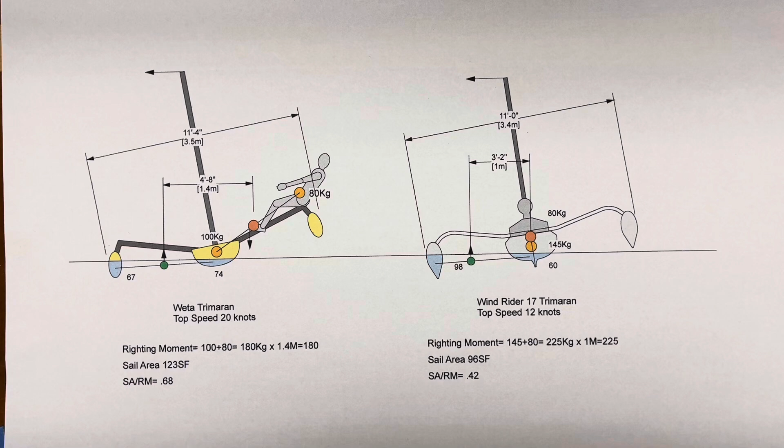Okay, so if you haven't already, I highly recommend that you watch the first half of this two-part video on righting moment so that you will get a better understanding. What I've done is taken popular boats and drawn them on my CAD system to scale, at least 95% correct. I know the overall width, I know the width of the hulls. I don't really know the dimensions of the outriggers on these, but I've studied pictures and I think they're fairly accurate.

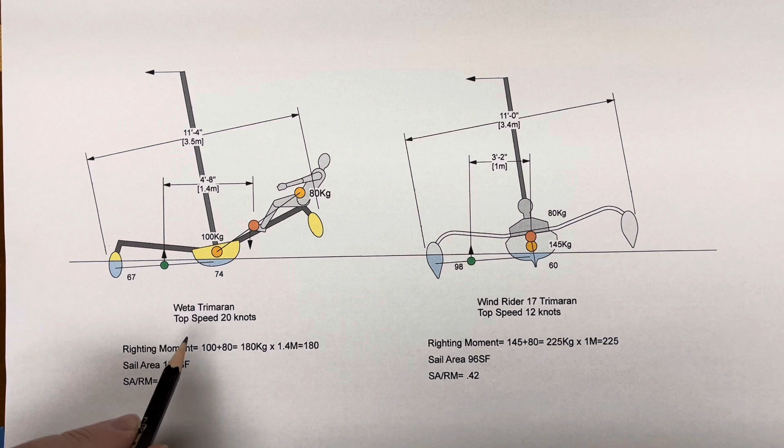So what we have here is the Wind Rider 17 trimaran, extremely popular with the Everglades Challenge and races like that. And then we have the Weta trimaran. Now both of these trimarans have floats that are less than 100% volume, meaning the center hull cannot lift completely out of the water.

Let's look at this one first. On this one, you stay inside the cockpit of the hull and you don't shift your weight. The weight of the boat is 145 kilograms, the weight of the person I'm just picking 80 for all of these. So the two dots, the person and the boat, are basically on top of each other. Then the righting arm, once you start heeling and going faster, you heel about 8 to 10 degrees, and you're sharing buoyancy between the two hulls. In this case, slightly more than 50% of the weight is in this hull compared to the main hull.

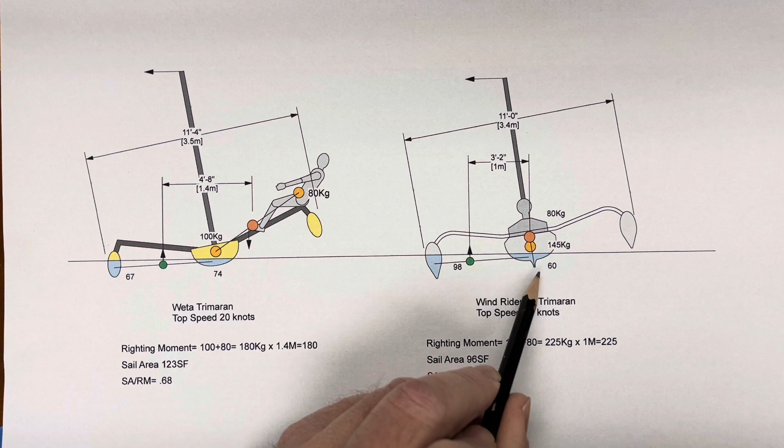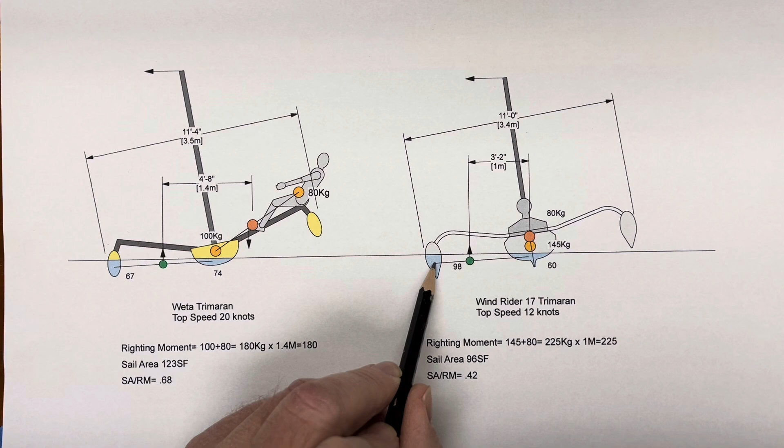These are the cross-sectional areas of the 98 and the 60, so that's where I get the position for this dot. It's slightly to the outside of the middle, between the centroid of this area and that one. So you get a distance of 1 meter, 3 foot 2 inches. The sail area on this one is 96 square feet, so you divide the sail area by righting moment and you get 0.42, which is really quite average.

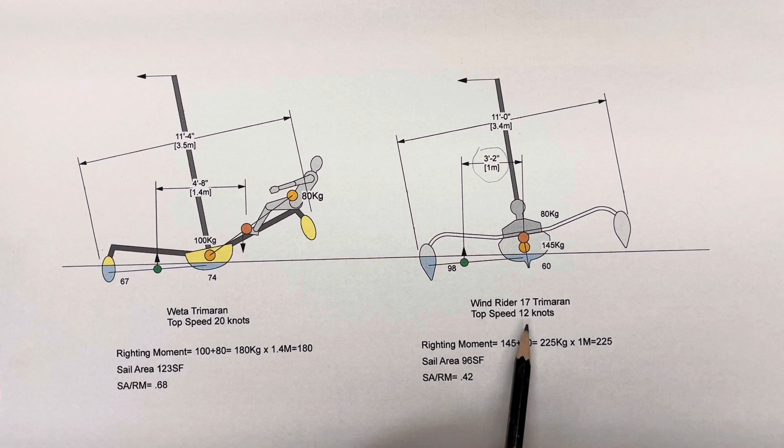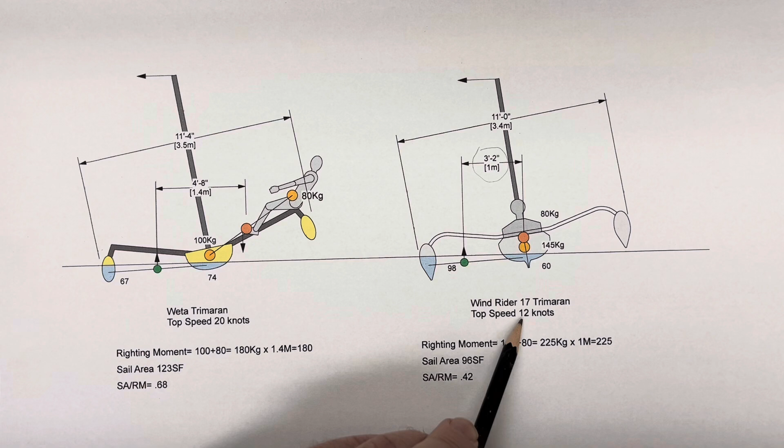The top speed of this boat is about 12 knots, and it's very similar to the Hobie Adventure Island, the Hobie AI. I believe both of these boats can go around 12 knots, but not over 12 knots.

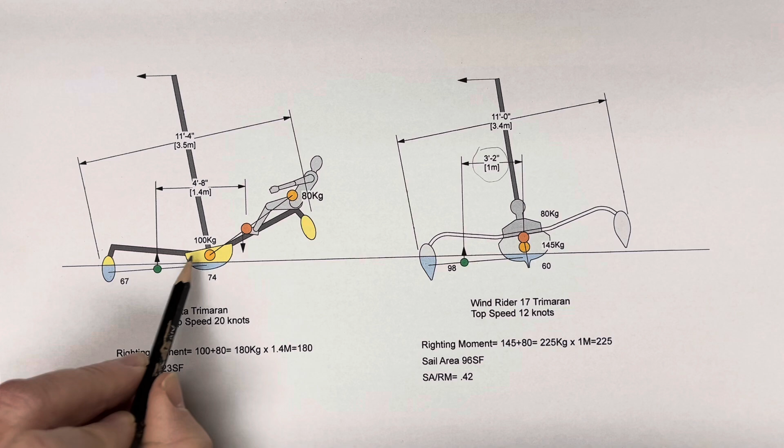All right, now we have the Weta trimaran. The difference between these is you can hike out on these wings, and these wings are pretty big. I saw a guy who got his center of weight almost on top of the outrigger. Now on this one, these outriggers have lower volume than these, but you have so much more leverage arm from the shifting of the crew weight.

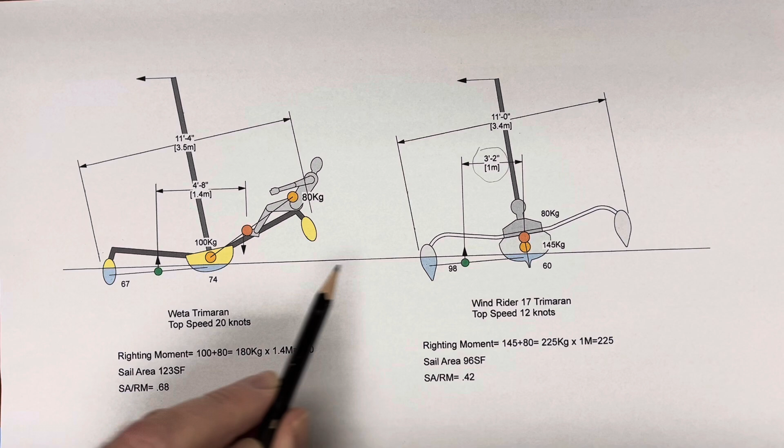So in this case, the boat is lighter. This boat was 145 kilograms; this one's 100 kilograms. This one's 17 foot long, but this one's 14 foot long. But the hull is a little bit more - this middle hull is a semi-planing main hull, and this one is more of a displacement hull. It doesn't really plane as much.

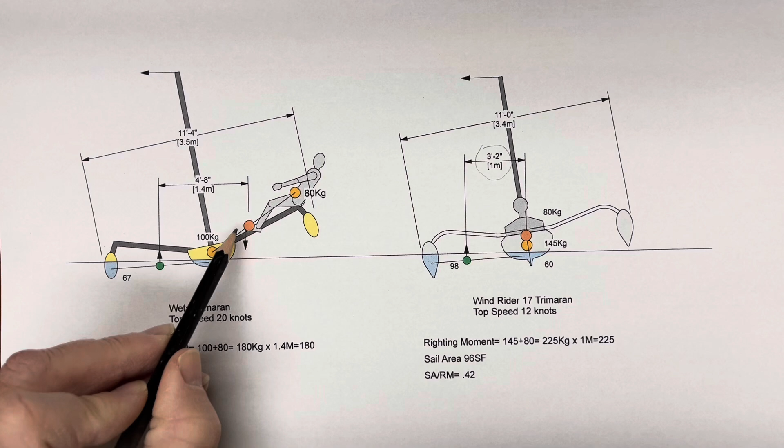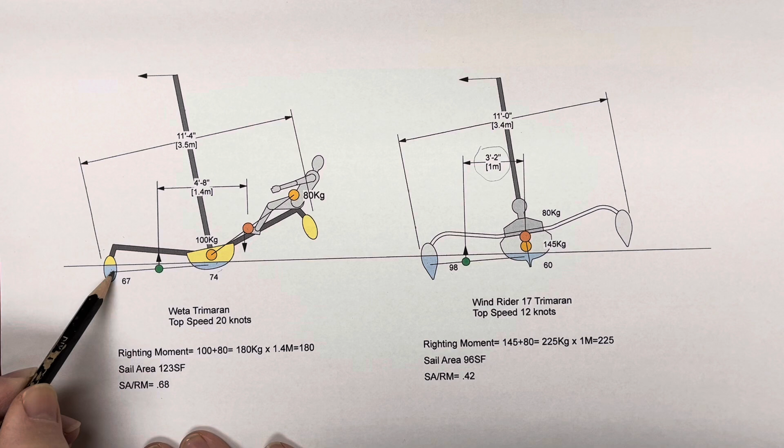If we take the weight of the boat and the weight of the person, and find the average, we get this position for the total weight. Looking at the areas of these two floats, this one is actually a little bit less than this one, so this float carries slightly less than 50% of the weight compared to this one. So this dot is slightly inside of 50%, and we get 1.4 meters compared to 1 meter.

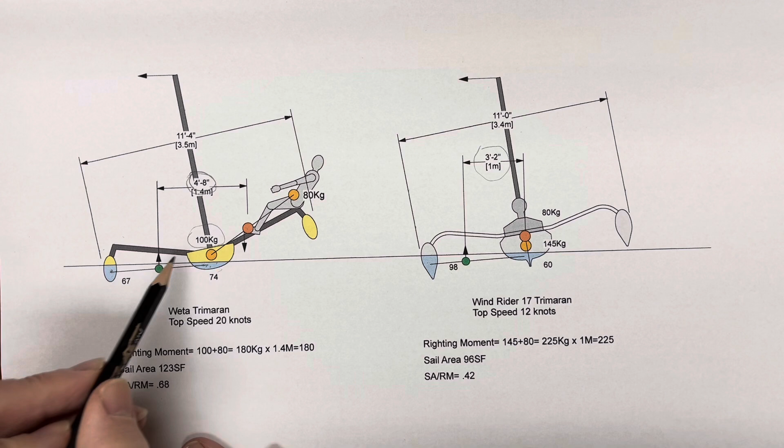Sail area, if you look at this number here, it's quite high - one of the higher numbers I've seen. It's not as high as a windsurfing board, but it's quite high. It's more than the Hobie 16, and it's more than the 49er skiff.

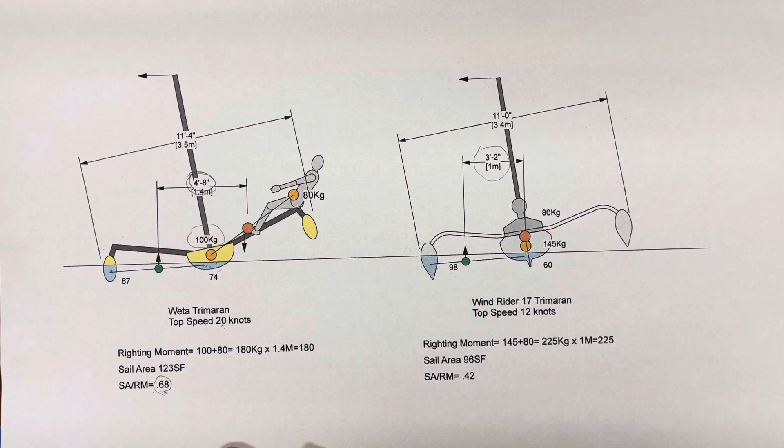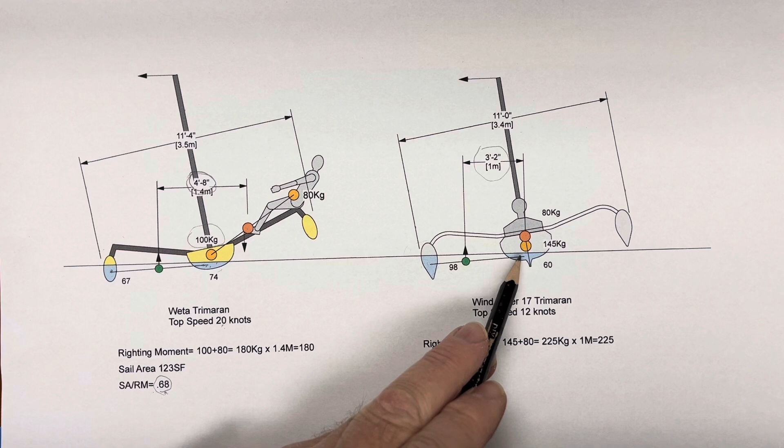So there's a couple of things that could have happened with this design. If these floats were larger volume, it could handle a bigger sail and probably go faster. The other thing is it could have slightly more of a planing hull in the middle, like this one, and I think that would help it a little bit as well. The problem with having a planing hull in the middle is what if the wind is like 5 knots? Then your boat might actually go slower.

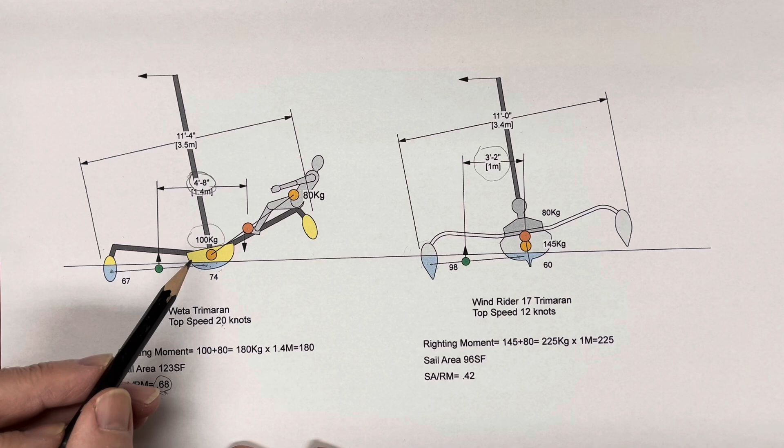I've watched videos of this boat. A lot of times at low speeds, you'll notice that the transom is wet, so it creates a little bit of drag. This boat is basically designed for sailing at higher speeds, and there's always a compromise - at lower speeds it has a little bit more drag than this one, but it has a higher top speed.

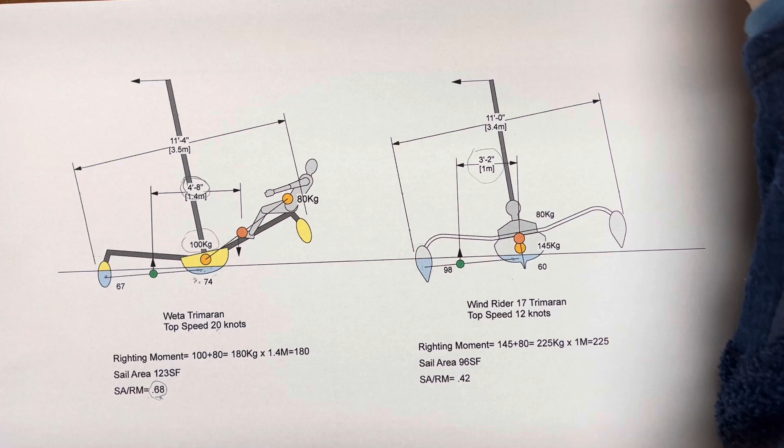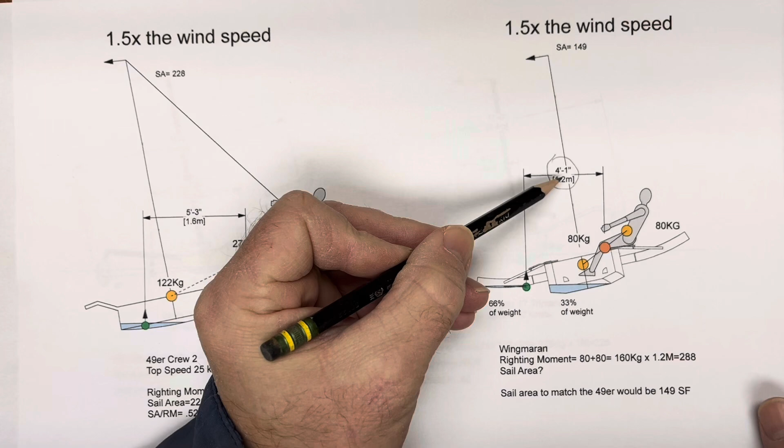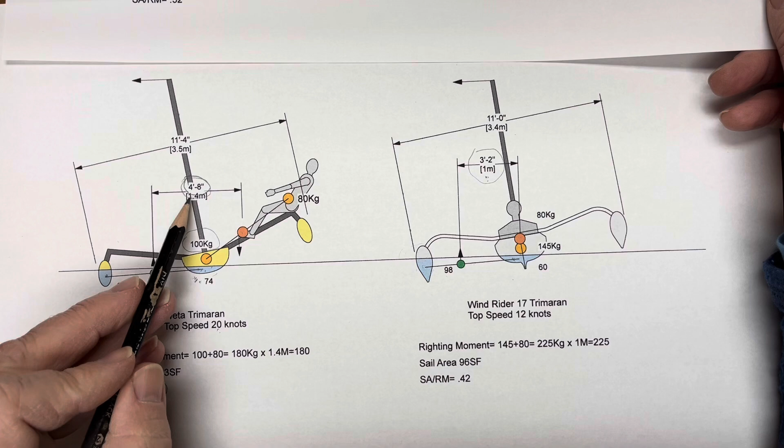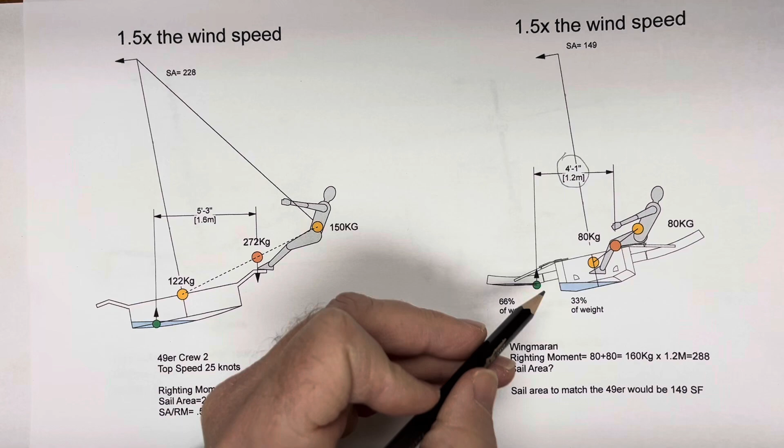Interesting fact - this is the Wingmaran, the boat that I recently designed. I went ahead and found out what this distance is - it's 1.2, or 4 foot 1 inch, which is greater than the moment arm of this boat, and less than the moment arm of this other boat. So I predict a speed somewhere between 20 knots and 12 knots for the Wingmaran - I'm assuming it's going to go about 16, maybe 17 knots.

All right, let's get into the high-speed boats that have at some point held speed records. This is a very interesting boat - it's basically a one-way proa. If you look at it from the top view, it's basically a Y-shaped structure with 3 rectangular floats.

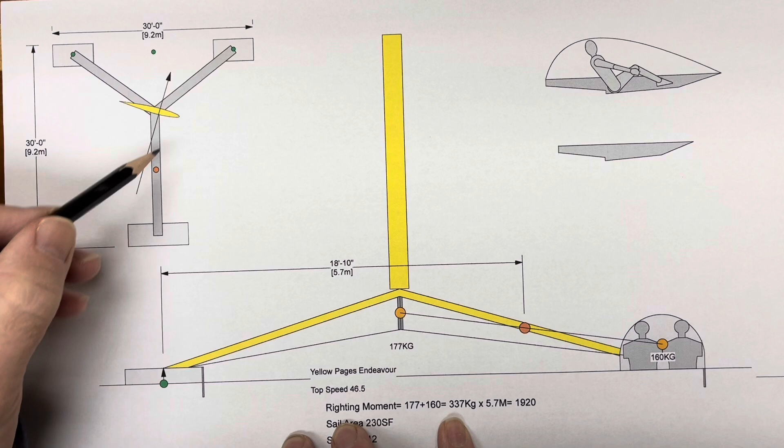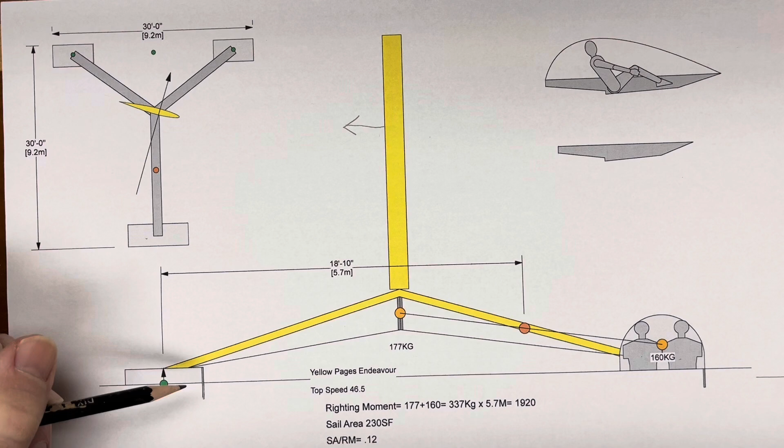This one is a little bit bigger and houses 2 people, side by side. This is the back view of this boat, with the wind blowing that way. This is a hydroplaning surface, and I believe the leeway resistance is provided by some fins, which I believe are on the windward side. There's a fin here.

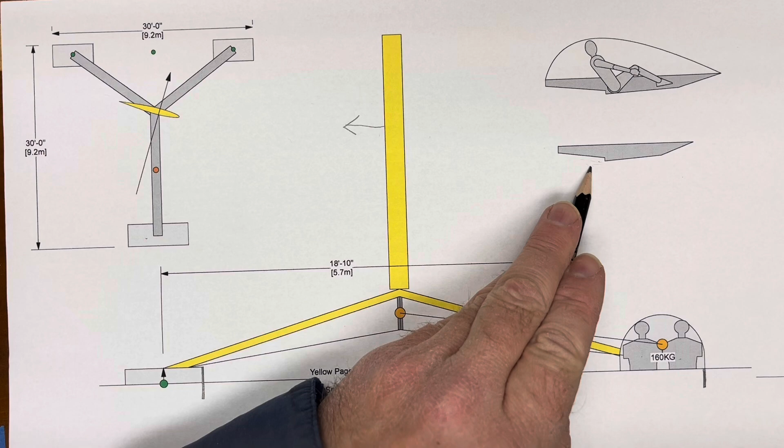When this boat gets going really fast - all of these hulls have this cross section. For low speeds, it has a little step, very much like the float on a seaplane. After it gets to a certain speed, the wetted area is from about here to here somewhere, and it has a steeper angle on the front.

And the one that houses the people is a tiny bit bigger, and it has a canopy - an aerodynamic canopy. And there's two people here.

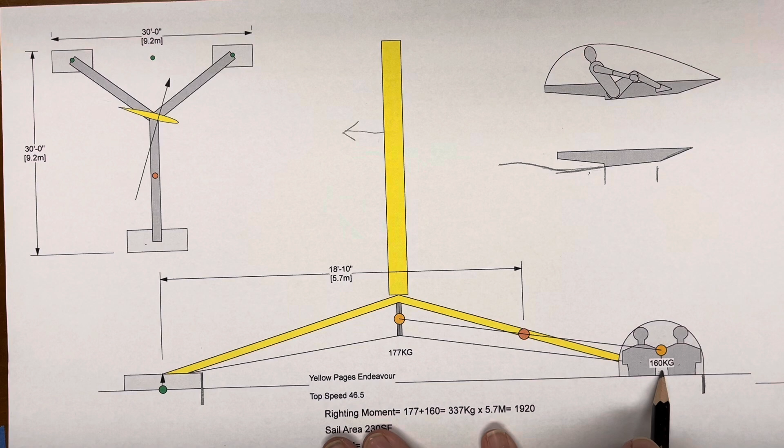That's about 160 kilograms - I don't really know the weight of the people that actually beat the record, I'm just making up a number here. But I do know the weight of the boat - it was 177 kilograms. So I can determine the position of the center of mass of the boat plus crew, which is right here.

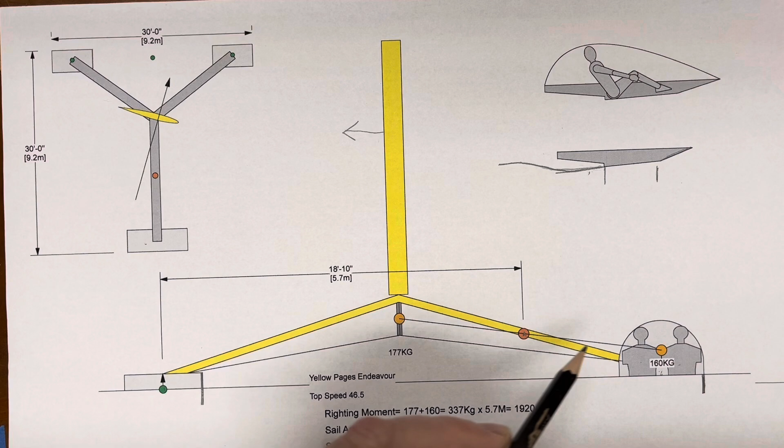And I know the center of lift is going to be on this float because this one lifted about a foot off the water, if you look at pictures of it. So all of the lift is right here - actually there's two floats, and the center of lift is centered right here.

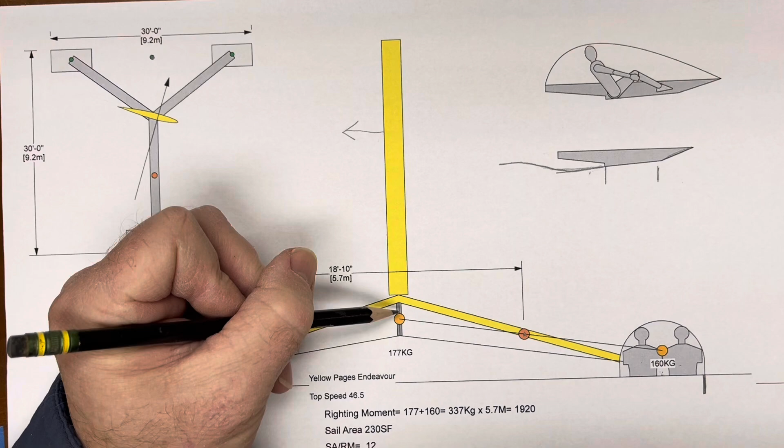The center of the sail is here. It's a wing sail, and it's unstayed - they have these high tension wires underneath the truss system, and that's what keeps the sail from falling over.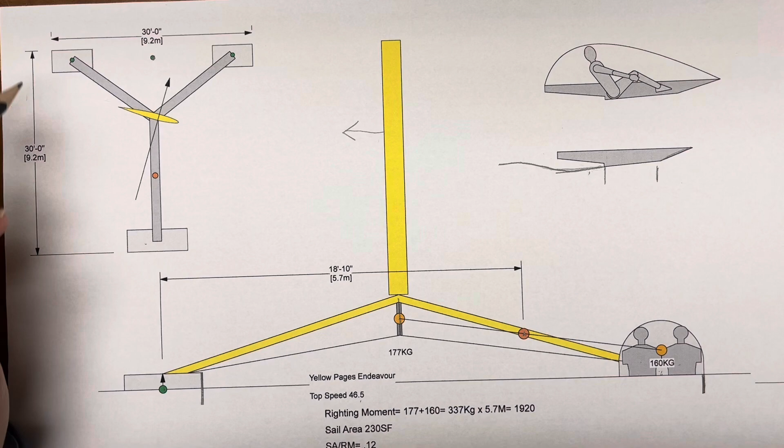The top speed of this boat was 46.5, and the interesting thing to note is the length of this boat is 30 feet and the width of the boat is also 30 feet - so it's a perfect square.

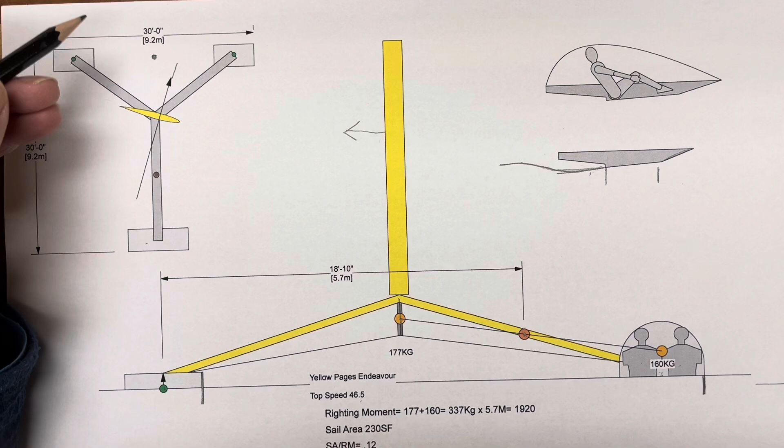Another thing to note is the sail - the center of effort is in front of the center of lift, and the center of mass is in front of the CE. What I don't know is what these angles are - I just basically estimated them. It could be that this is asymmetric, but it looks pretty symmetric to me just from looking at it.

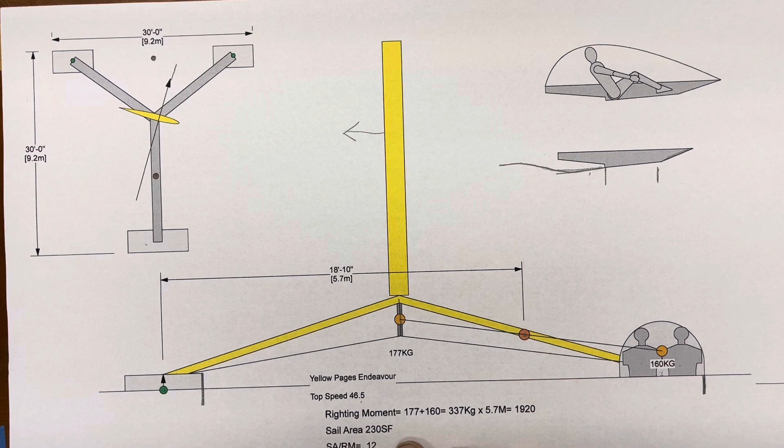There is not a lot of information on this boat. There's not a single video that I found.

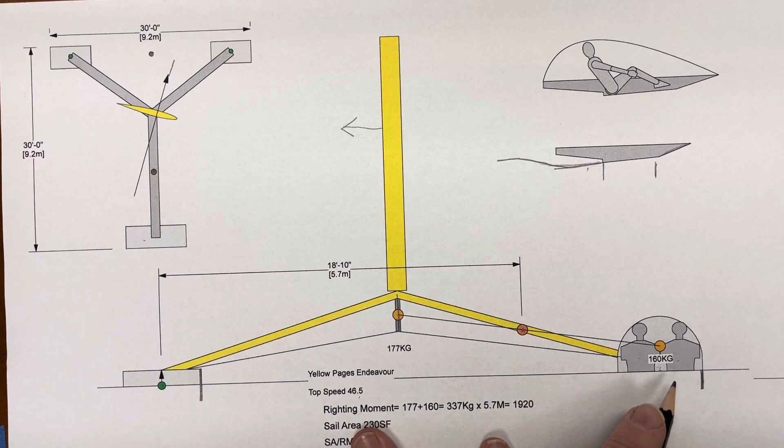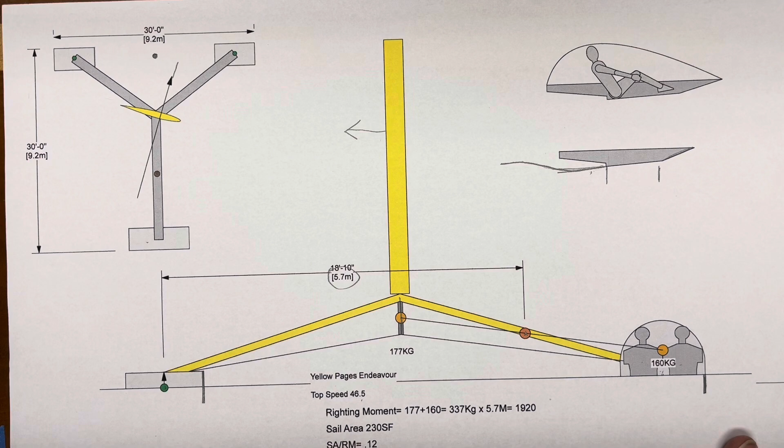Maybe there is a video, but it's not available on YouTube, at least not that I have found. But it is basically a boat that has 3 skimming pads, and the righting moment is 5.7 meters. It also has a sail area of 230 square feet, and the ratio of sail area to righting moment is 0.12. So this is very low, and I assume it's because they don't want the thing to flip over, because if you're sitting in here and this thing flips over, that could be extremely dangerous. So I think that's why this number is so conservative. But it does have a very efficient sail. It's a wing sail, and it has 3 hydroplaning skimmers.

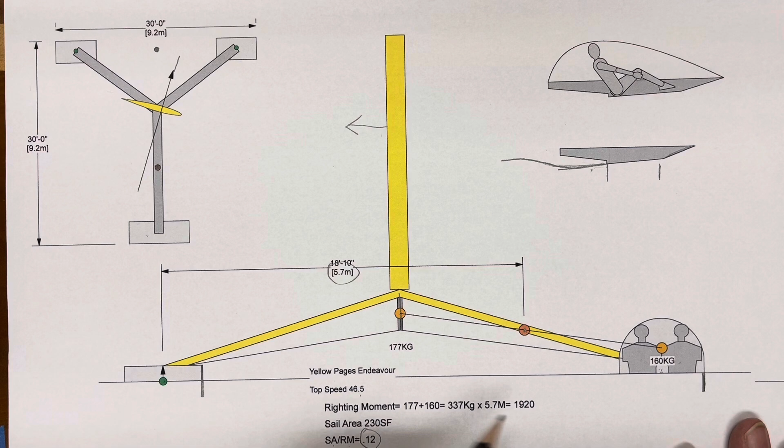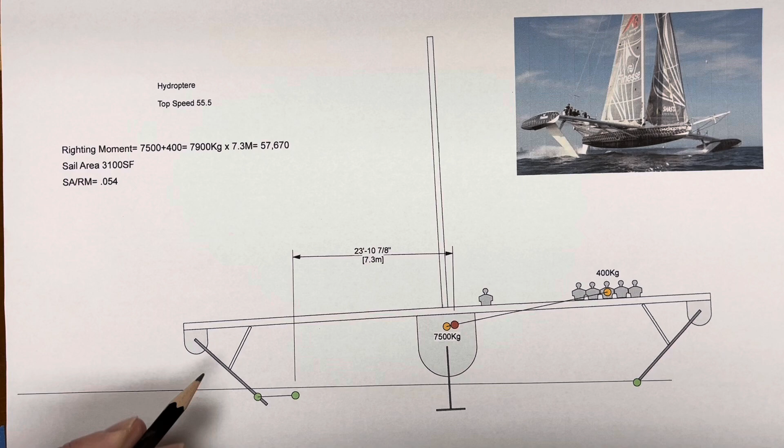Okay, so here's the same deal with this. This is called Hydroptere. This is the only boat that I've ever seen in my life that is wider than it is long. This boat is, I believe, 60 foot long, but it's 78 foot wide. Here's a picture of it. It's a hydrofoil boat, and it's got these angled foils. They don't really use this anymore, but they used to use this a lot. Actually, they still use angled foils somewhat, but they're usually not attached in this way.

So this boat, when I looked up the weight of this boat, I was kind of startled that it's 7,500 kilograms. And okay, so here you have the crew, five people on the wing. You can go up to about, it looks like, see if there's the people, 1, 2, 3, 4, 5, 6, 5 or 6 people. That's only 400 kilograms. The boat is 7,500 kilograms. That means that with all these people over here, it just moves the center of mass like literally about a foot to windward.

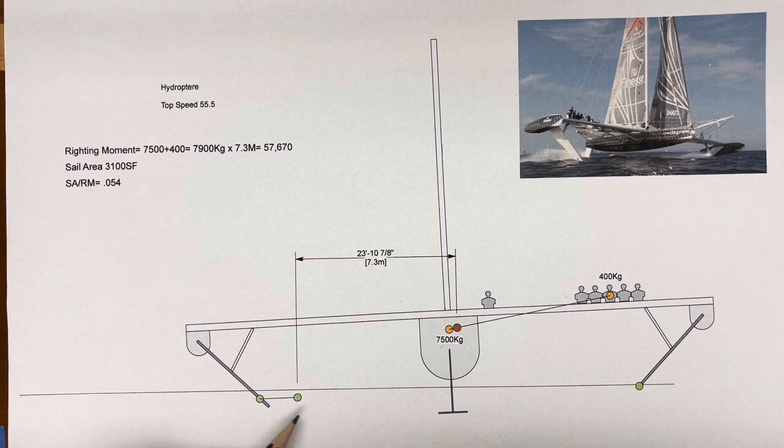Then you have lift coming off of both of these foils, but I'm assuming that the lift from this one is about 10 times as big as that, because the boat heels a little bit, and this foil's angle changes a little bit, and this basically lifts out, so it's almost not doing anything at all. So I'm just assuming, I'm making an assumption that the center of lift would be somewhere around here, which is 10% moved this way, between here and here. And I believe this boat had a T-rudder as well, and that's how it kept its stability.

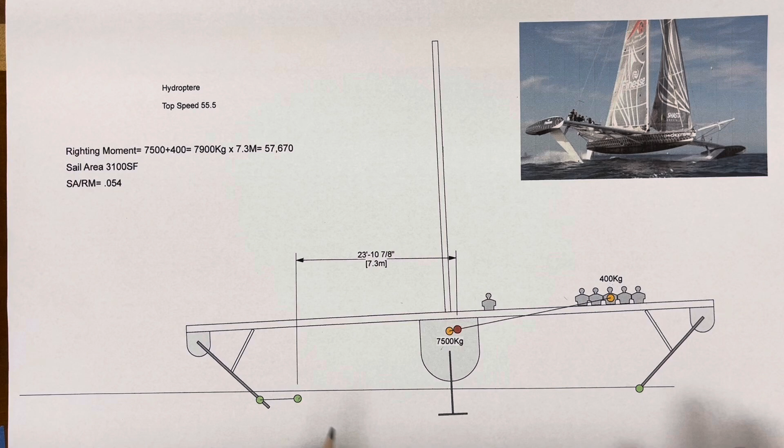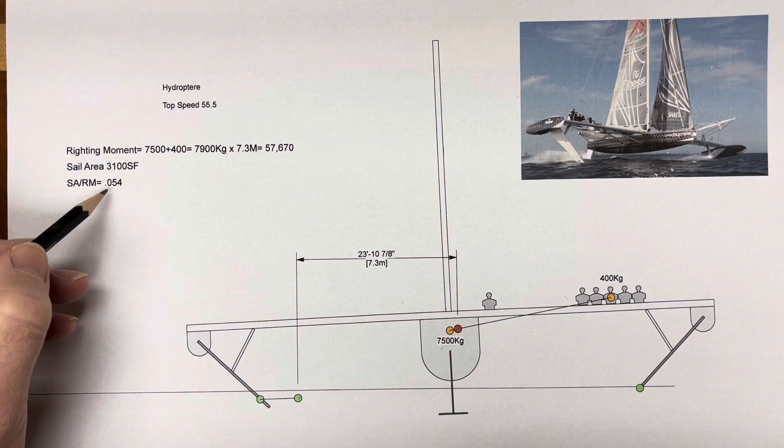So it has a righting arm of 7.3 meters. The sail area on this boat was 3100. I know some people want to see it in square meters, but I just kept everything the same, so this is square feet. Now look at this ratio. This is the weirdest ratio I've ever seen. It's the sail area to righting moment is 0.054, which tells me that the sail could have been bigger on this boat. It probably could have handled more sail.

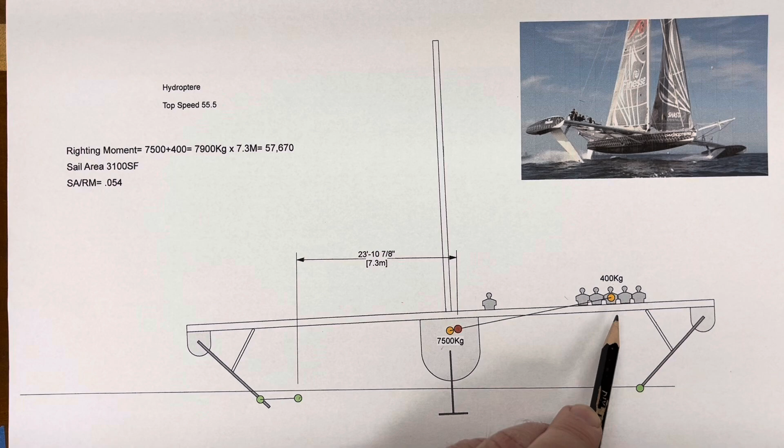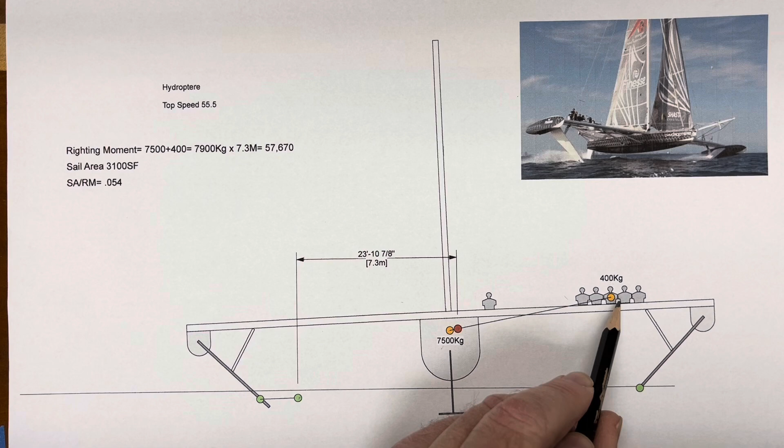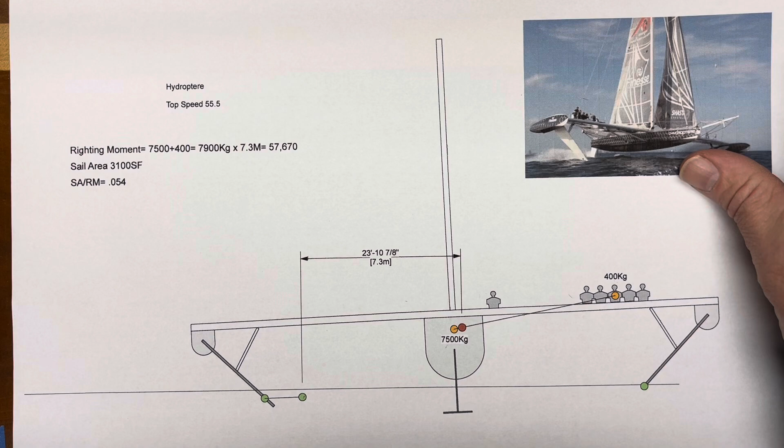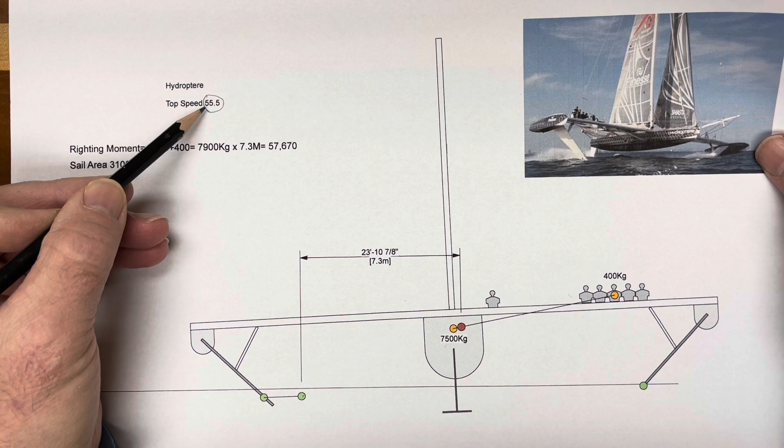The other thing is, if you scaled this down, then the crew weight would have more effect on this boat. And if you scaled the whole boat down, didn't make it 60 foot long, you could probably get better results. Then the ratio of the crew weight would be bigger compared to the boat. This dot would be more over here somewhere as opposed to here. Of all the boats that have a vertical mast, this boat is pretty much the fastest. I don't know of any other boat that has an uncanted mast that's straight up and down that has gone 55.5 knots. That's my take on this boat.

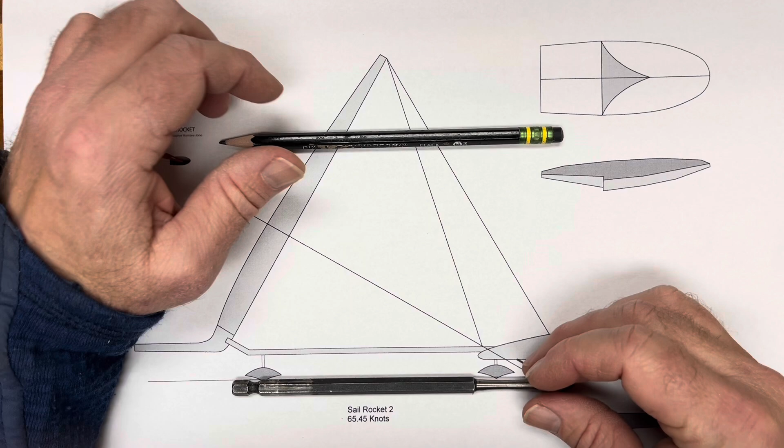Now let's get to the overall winner here. This is the current record holder. And let me get another pencil here. Okay, so with all the other boats, you had the sail going this direction, and you had the fin that's under the water going this direction. So what happens in this boat is these two forces go like this, and you have no righting moment. The sail force is going this way, and in this case...

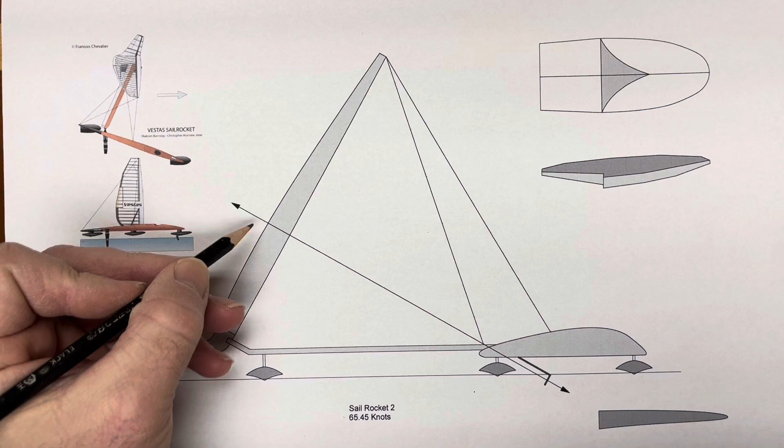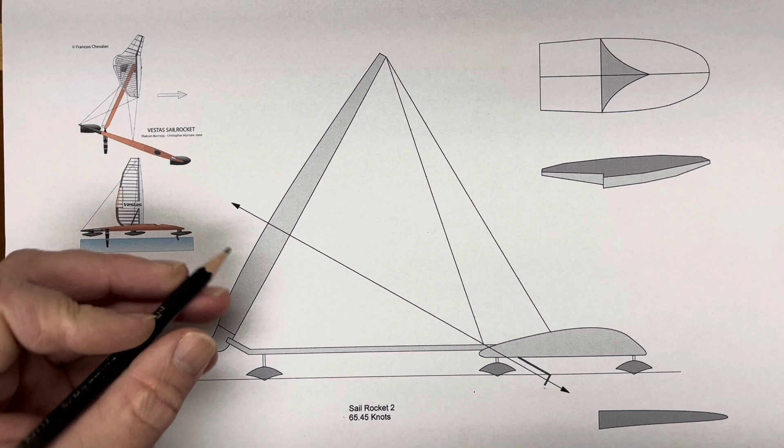This boat would fly into the air if it didn't have something holding it down. And so this foil is actually used as an anchor. A lot of people don't realize that. Everything else about this boat is making it kind of like fly into the air. These are skimmers, so that they're creating hydroplaning lift. This sail is canted, so it has an upward component and a sideways component. There's a forward component of the sideways component, and that's what gives you the forward thrust. But there's also a vertical component here, and the same thing here—there's a vertical component here.

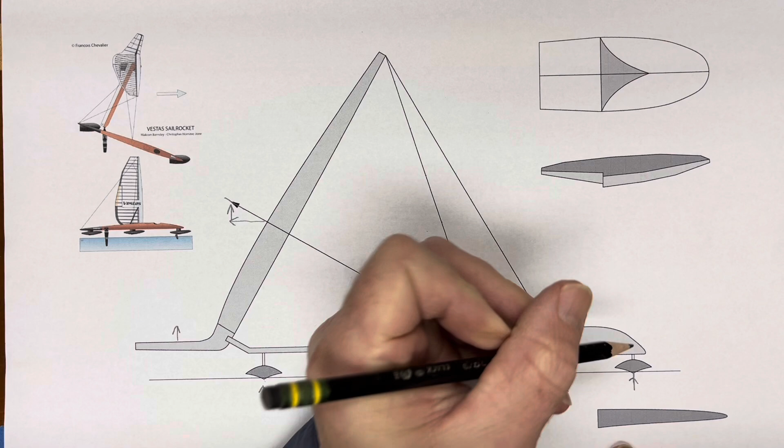So when it gets going really fast, this skimmer is not even touching the water, and this one isn't either. The only one that seems to be, well, these two kind of skip, barely skipping. And so these skimmers have more dead rise than some of the other boats, because they're just skipping. And actually there is a fin somewhere—I forgot which—here there's a fin on the front one, so this is the front one. There's a fin here, and this is, I believe, how they steered the boat, with a fin on the front.

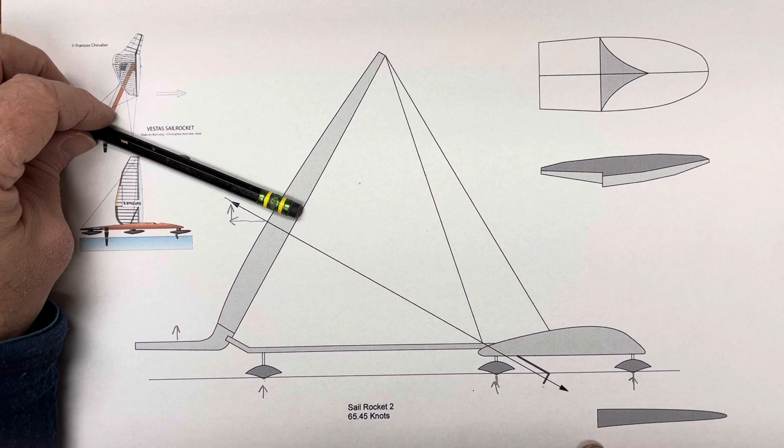Now, this is a top view. It's a very strange looking boat. The floats are oriented in the direction of the water, but the hull is oriented in the direction of the apparent wind, which is at an angle of around, I believe, 20 degrees.

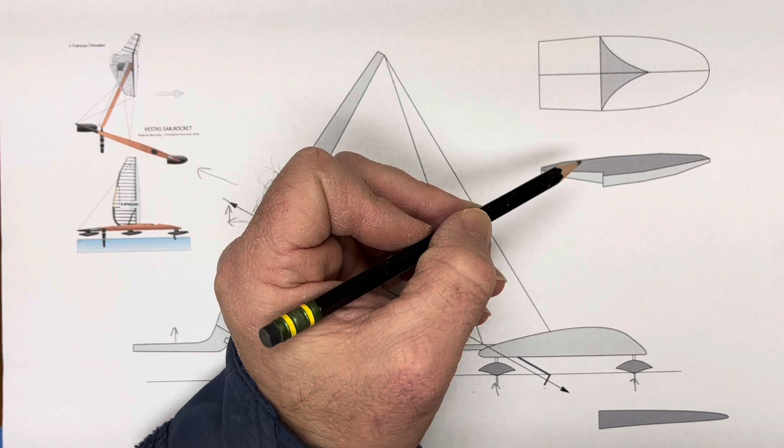So the apparent wind is going this way, the boat is going that way, and it's a very odd looking boat, but it's similar to the other boats in that it's a tripod of floats. And if you look at this, this would be the wetted area under the float. It would look like this, and the aspect ratio of this is only 1.

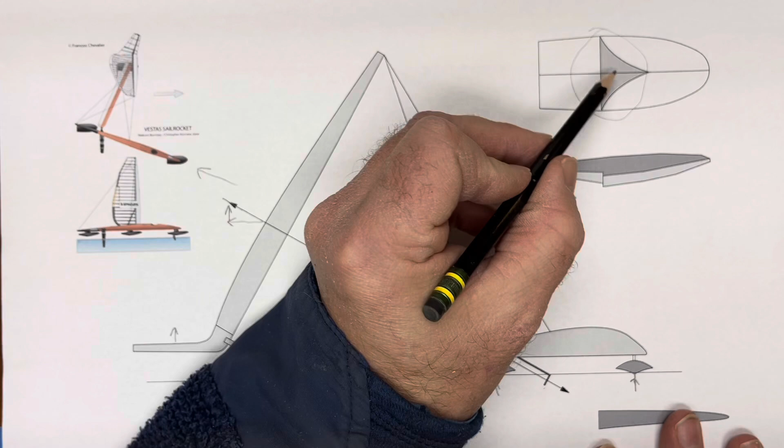Even the fastest boat in the world uses an aspect ratio that is not ideal. But it doesn't have to be in this case, because the sail is creating all this lift, and so these are basically hopping along. One more interesting thing, this right here is the shape of the underwater foil.

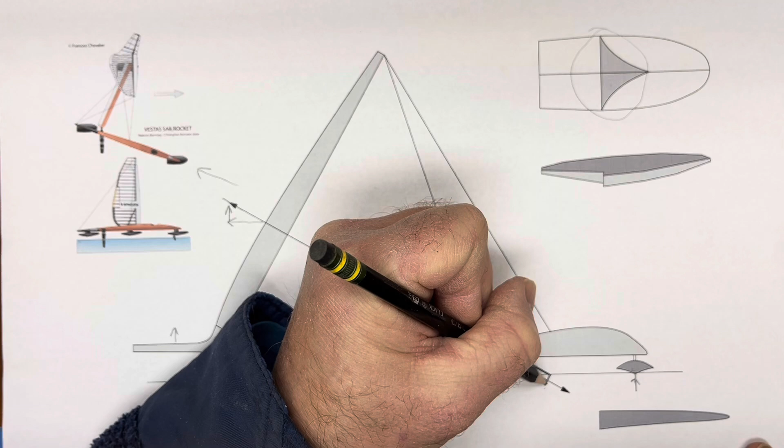So this tiny little foil here, which is only like 75 centimeters long, whatever it is, it's a tiny little fin, and it's used as an anchor, but it's in line with the sail. So these two forces go in opposite directions, but they're slightly forward.

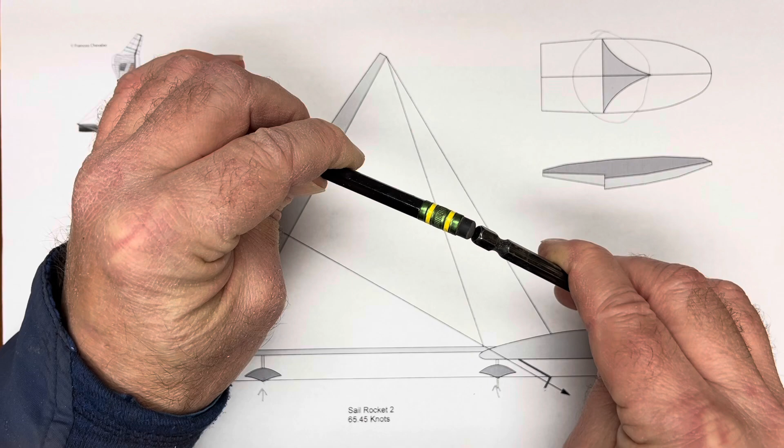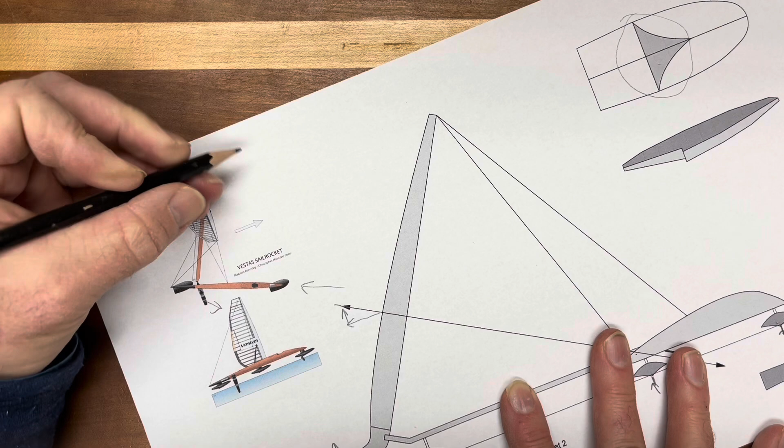If you would rotate these forces 90 degrees, you'd have something like this. And then if you take the sum of these forces, the fin is creating lift this way, and the sail is creating lift that way. And if you take the sum of those, you get forward velocity that way.

The thing is, length waterline. I like asking this question: what is the length waterline of this boat? Well, the point is, it doesn't really matter anymore when you're hydroplaning or hydrofoiling. The length of the boat, the shape of the boat, it doesn't really matter anymore, because it's not in the water. Back to this foil.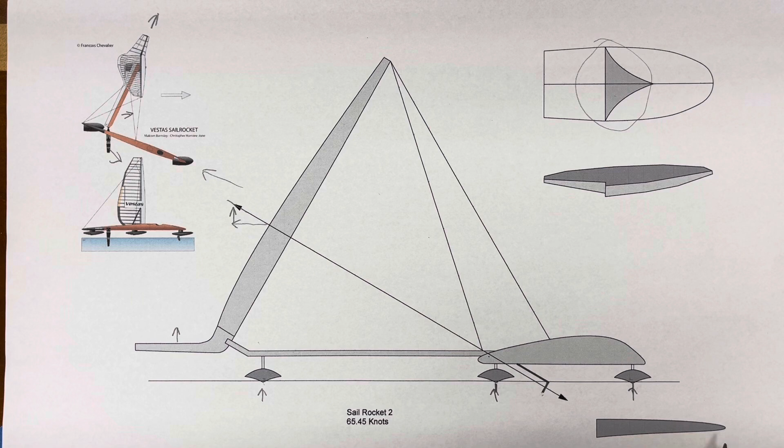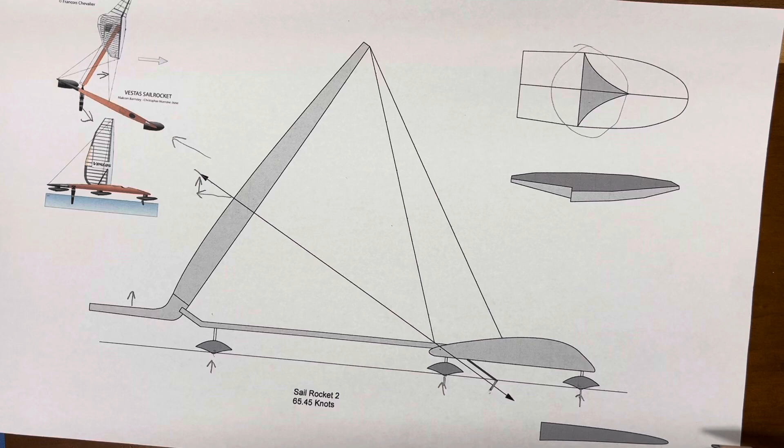This foil is not a normal foil. This is called a supercavitating foil. So what that means is, the entire length from the front to the back, there's only high pressure. There's no low pressure, in other words, no shaded area. So if you were standing here and looking this way, you would see the whole thing, the oncoming fluid actually sees everything. So there's no shaded area.

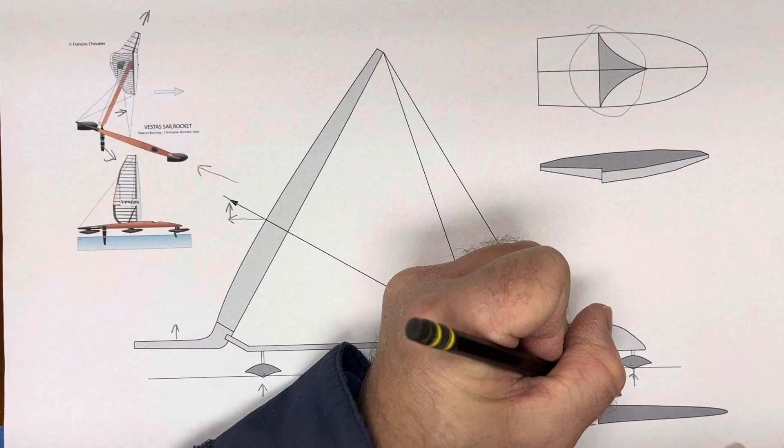And so what happens is you get a separation bubble back here, and you get cavitation behind it. There's no cavitation in front of the transom. And so this was needed to reach the speeds, because all the other foils that people were using were cavitating at speeds lower than, what is the speed? Oh yeah, 65.45 knots. That's the speed of this boat.

And now, what's going to happen after this? We already know that aligning these two forces works really well. Having a foil in the water to anchor it works well. Now it's just a matter of reconfiguring the structure.

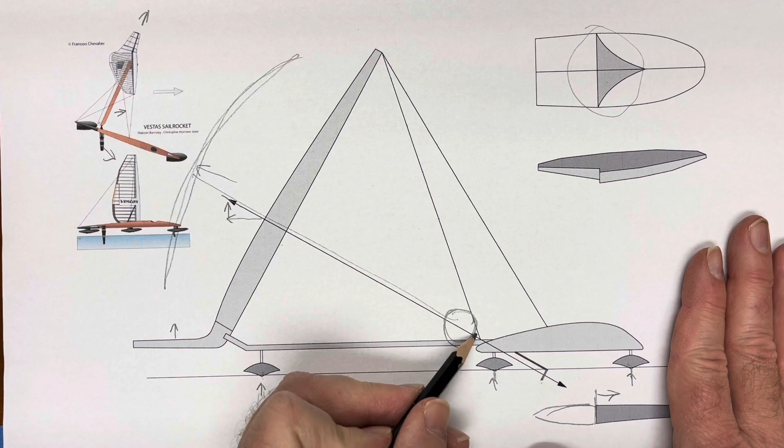Some people have proposed a big kite on a string, and sometimes there's one where the fuselage is literally between the two. It's right here. There's a person in a fuselage, and it's floating. I mean, it's basically flying over the water, and the only thing in the water is this tiny little hook, and the sail is way over here.

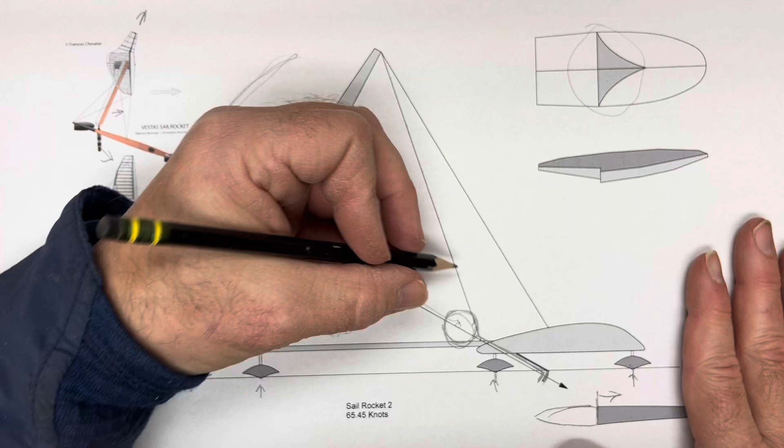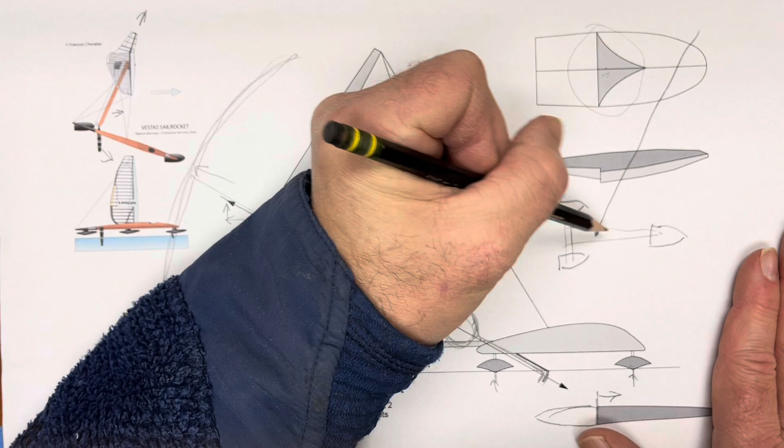That's one proposal, and then there's another one which is more like a tripod from the middle. So there's 3 floats, all of them very similar to this float, and then the string is attached here in the middle. The center of mass is slightly in front of where the kite string is attached, but then there's a hook underneath the boat, and so that's the next evolution.

And I don't think any boat is gonna beat this speed unless it has these two forces lined up. I think that is the future, and I think everybody is in agreement with that.

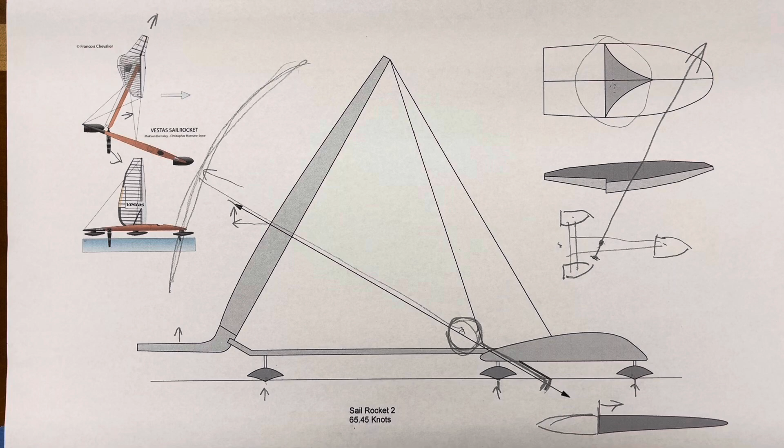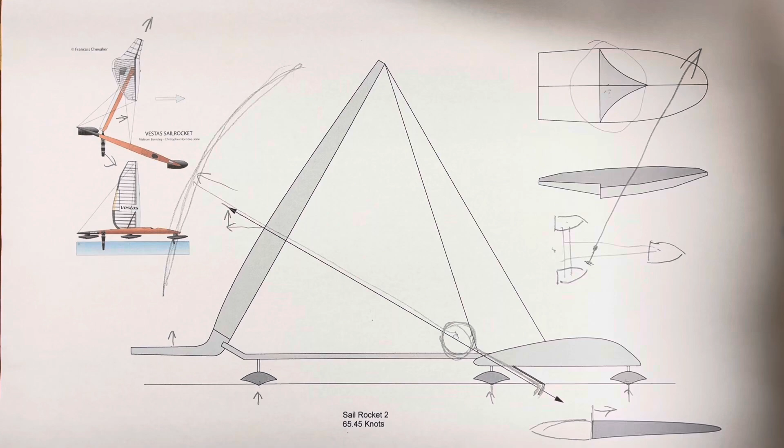But the other thing I want to point out is this boat, you can't really sail it normally. It doesn't tack. In other words, it only goes in one direction with very limited waves. It's not designed for anything but that. Same thing with this boat. It only goes in one direction. The wind has to be going this direction. It's basically asymmetric.

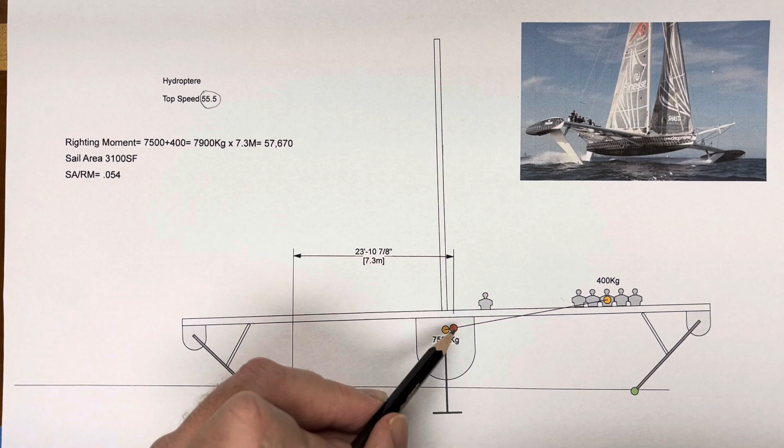So the only boat that is a normal boat that can tack in both directions is Hydroptere. So I think a smaller version of this with a lighter mass, and maybe a bigger sail in proportion to its weight, would be a really fast boat.

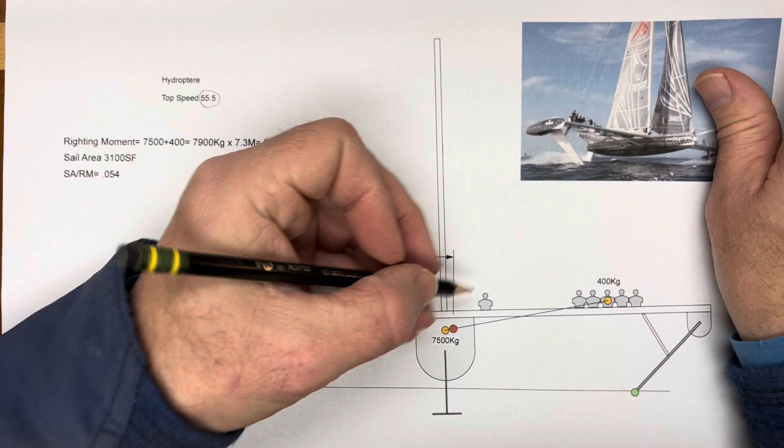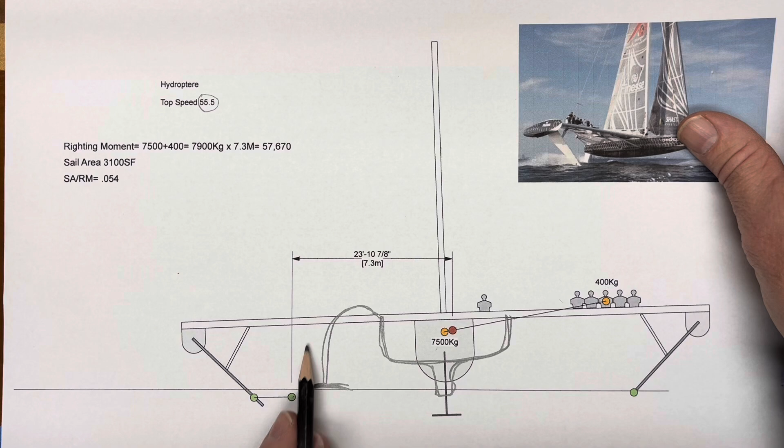And there's not much difference between this and the America's Cup boats. The America's Cup boats look like this, and instead of this big old wing, they have a wing that goes like this. So the boat is not as wide, but it still gets the lift almost to the same spot as Hydroptere got its lift.

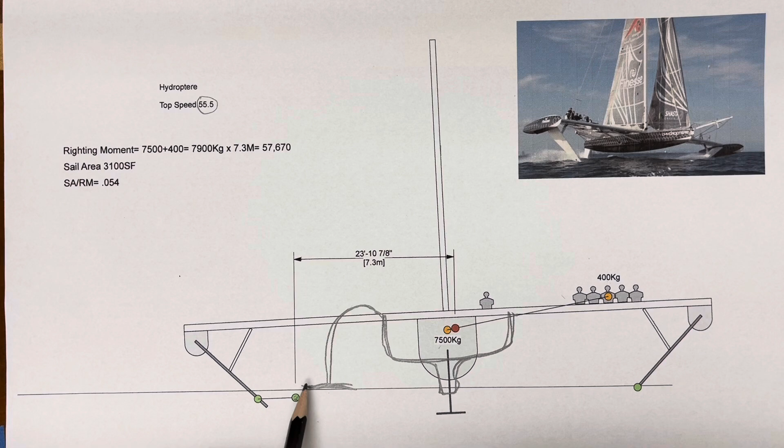It's just a little bit in, and these boats go, I believe, 39 knots. They might go faster than 39, but the last time I checked, I think they were going 39 knots, and they could probably go faster if this wing was a little bit further out. But these boats are a whole lot lighter than Hydroptere, and anyway, that's all I have to say.